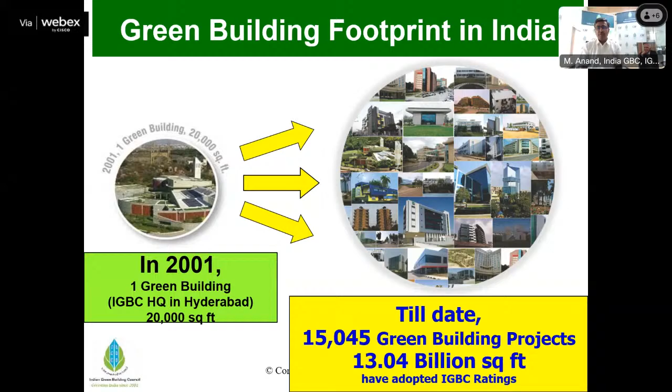Anniversary is on 26th January. We celebrate this Harit Prem Bharat Mahotsav as part of the celebration. Every day we celebrate his ideas, inspirations, and his thoughts. But this particular week is all the more important for us because he is a guiding light of India's green building movement. He is the Bhishma Pitama of green building activities and sustainability as far as we in India are concerned. This is one of the lovely interactions we had way back in 2002 itself, almost 22 years ago.

Even before walking into our own IGBC headquarters, we were involved in a seminar and workshop led by Dr. Prem Jain Saab in New Delhi on energy efficient windows and buildings. This was one of the earliest interactions. I myself am very blessed and honored to share that Dr. Jain Saab only caught hold of my hand and asked me to be part of the panel discussion, which I'm very blessed to be part of this particular journey.

Started in 2002, and then Dr. Jain Saab was involved in all the important rating programs till 2018. India's first green homes rating was launched by 2007 under his leadership. World's first rating program on metro rail network, world's first rating program on townships, railways - the list goes on and on. 22 different IGBC rating programs have been launched under Dr. Prem Jain's guidance, covering majority of the typologies.

IGBC's regional chapters - 30 of them are presently operational across the country. He was very passionate in launching new regional chapters across the country. He made sure that he attended every single IGBC regional chapter launch program, and was able to guide the new leadership coming up in the chapters, making all the chapters very vibrant and vivid. We remember all his contribution in making the IGBC regional chapters across the country, which are able to add more value to the stakeholders.

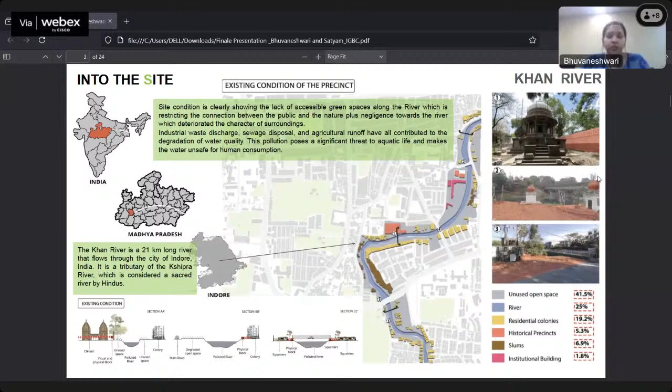So the first idea we put forward is to identify the built form priorities. We also conducted a survey asking about people's experience near and surrounding the river - what kind of open space they have for interaction with others, how safe they feel within a space, and what kind of activities happen around those rivers.

According to that, we found a few built form priorities, wherein certain built forms were supposed to be preserved, such as the chhatris, which have heavy heritage value. Certain structures were very old and had to be reconstructed or restructured, and certain built forms were unauthorized - scraping out those structures and providing better shelter in the surrounding area would be a better idea, is what we came up with. We also went through a few case examples to get a better idea on how to proceed with this project. One major project we studied was the Rajkot Greenway, the NMT corridor.

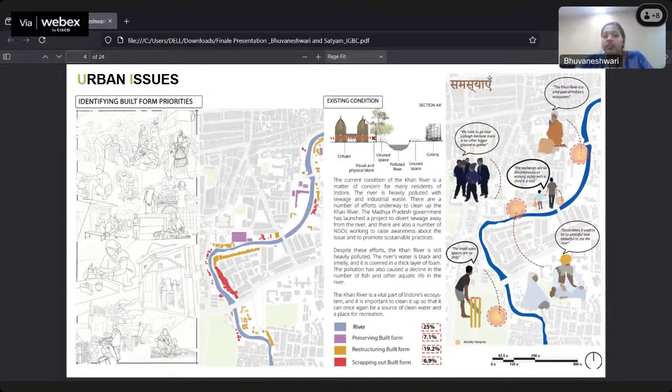So they had a beautiful idea of preserving the natural heritage of the river by making it people and pedestrian accessible. The way they had created activities and interaction between the nature and the people inspired us a lot.

There were a few key learnings from that, wherein they exhibited strong stakeholder engagement, created a safe and accessible environment, and how mixed modes of transportation for that area had helped the people.

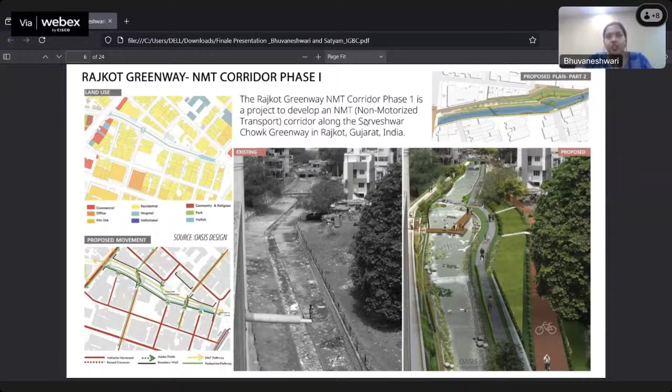And the design was not just based on the particular area. As I told, from cell to organ, they had provided for that area and connected that to a local area plan level, which in turn is a long-term vision, and how NMT is like a catalyst for a healthy lifestyle. Those are longer goals and visions we'll have to look at for a city's development. So this is our design approach.

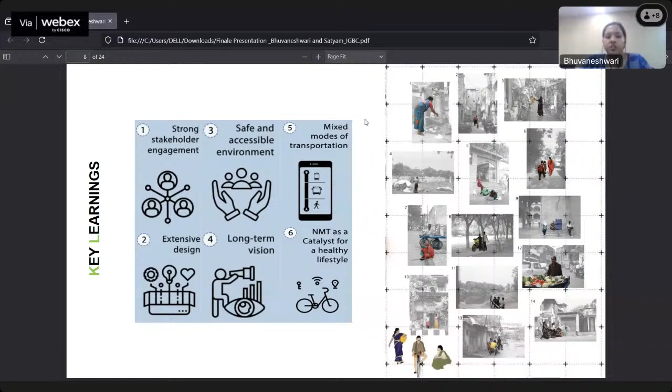For the concept part of it, as per the areas that I have marked here, this is just an earmarked area for us to exhibit our design idea. So we took a particular portion of this land so that we can exhibit this concept in that area and see how it works out.

Similarly, we created 3 typologies: placemaking and preservation, revival and rearrangement, and connection and collaboration. These 3 ideas were given specific case areas, and they were implemented as our design in those areas to exhibit our idea through them.

Whatever issues we found were the poor quality of water, inaccessible existing riverfront, and heritage which is inaccessible, and there is no riparian zone for the river's natural heritage, and absence of a soft edge and riparian zone along it.

So we wanted to prioritize the blue-green infrastructure over here so that it will be both beneficial for the nature and for the people using the same.

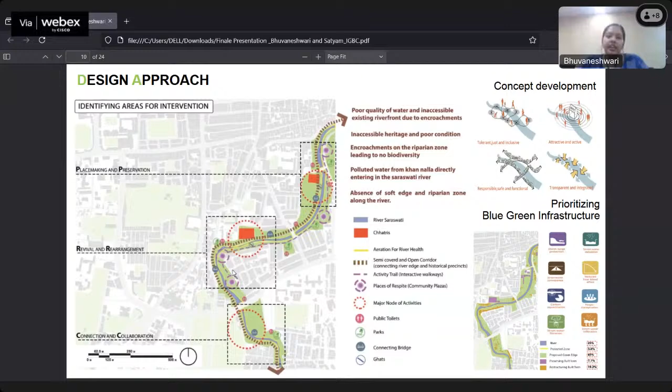With all that, we came up with a vision, which is reconciling the natural harmony of the past. We did not want to just keep the physical heritage over there; we wanted to collaborate the natural heritage with the physical heritage, and give the place a character as such.

The themes that we worked under were culture, ecology, place, and movement. According to these themes, we were trying to create a sustainable, accessible, and also an aesthetically pleasing urban green space.

The major things we were trying to address were the ecological degradation there and how we can enhance public access, while promoting urban greening and also preserving both heritages and building climate resilience.

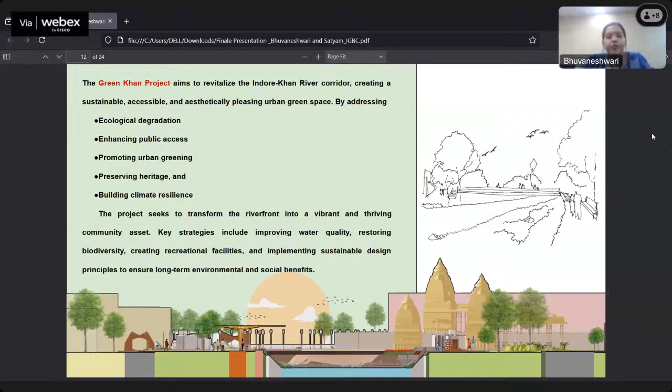So when we were doing this, the main concept of our vibrant urban voids would be incomplete without following the sustainable development goals. When we were talking so much about sustainability, we saw what are the major sustainable development goals that go into our project as well.

According to which we made our strategies. After the vision, coming to our concept and strategies: strategy A was to integrate natural elements into the urban fabric, strategy B was to design for walkability and cycling, strategy C was preserving historic buildings and cultural heritage, and strategy D was to foster a sense of community and connection. These strategies could also be done in phases.

So if the project is getting implemented, these strategies can be put from A to D in such a way that it can be the execution as well.

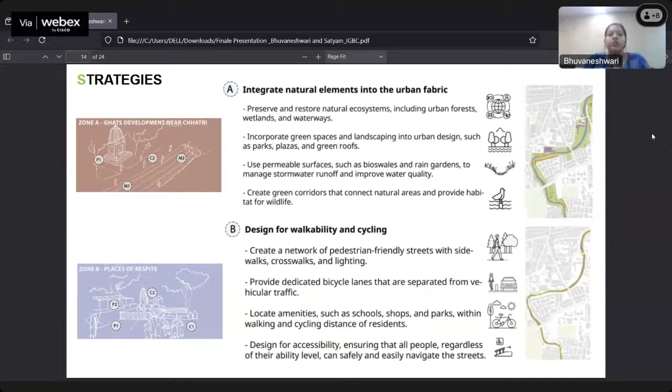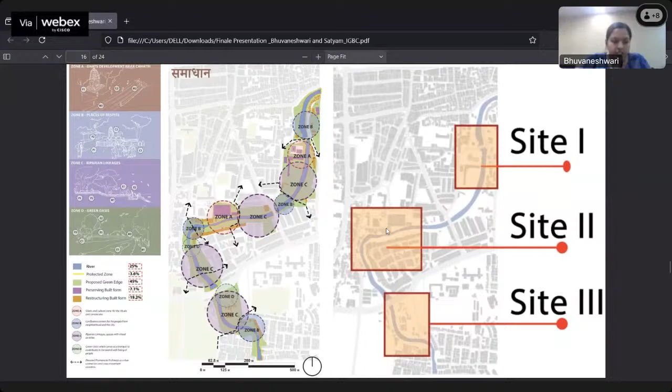So these are the 3 sites that we picked, and the zones we classified them into: zone A will be the Ghat and cultural zone, zone B will be the confluence corners, zone C is the riparian linkages we are talking about, and zone D is the green oasis.

So this is just a pictorial representation of what strategy will come where. It's just a very broad pictorial representation that we could do.

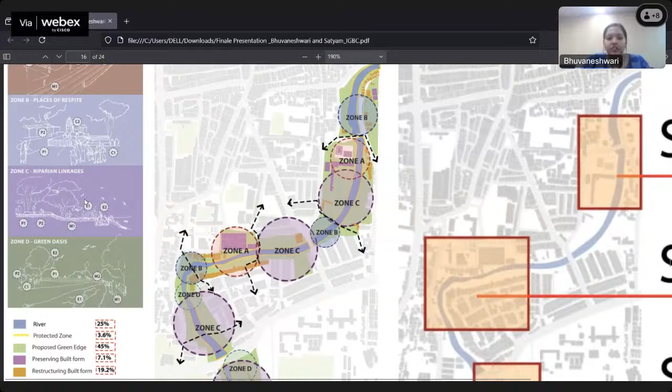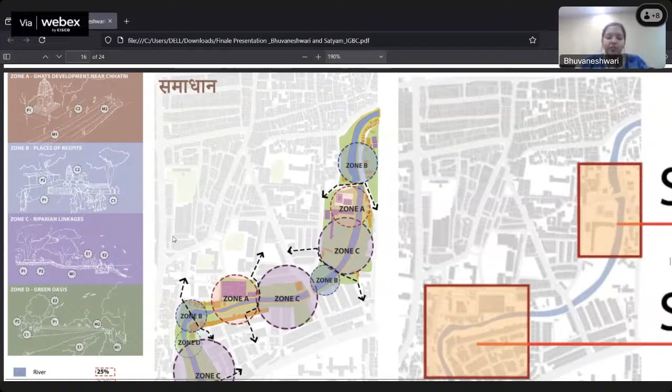So I am coming to the final design, wherein the sites have been developed. This was from paper to computer. In the paper, first we hand drew all these zones identifying each particular zone. After identifying each zone, we categorized them and put in a design related to that zone in that particular area. I do have a video explanation with the design walkthrough, so I'll briefly explain the design and then move to that video.

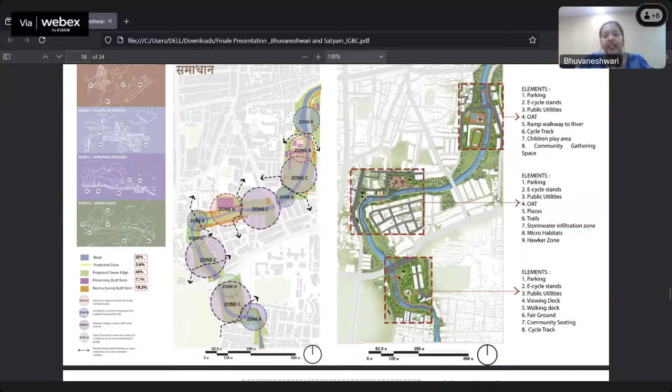The major issues we addressed were STPs to be constructed so that further exploitation of the water wouldn't happen. Whenever we plan for a waterfront or riverfront development, we should also consider how not to exploit the river further. Thus STPs and afforestation drives around that area, and also public awareness campaigns, are very important.

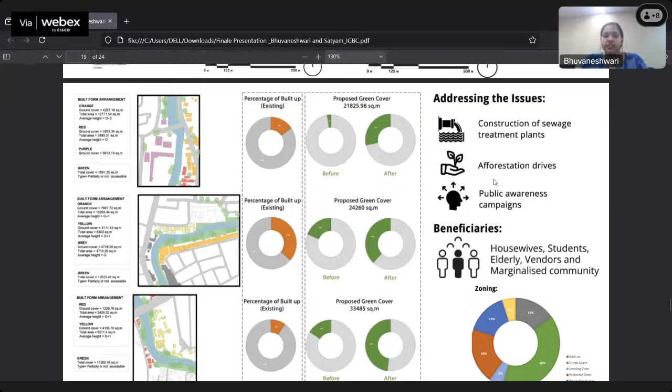The beneficiaries around this were the stakeholders, and comparing the existing built-up area with the proposed green cover, we can see a drastic difference between these two.

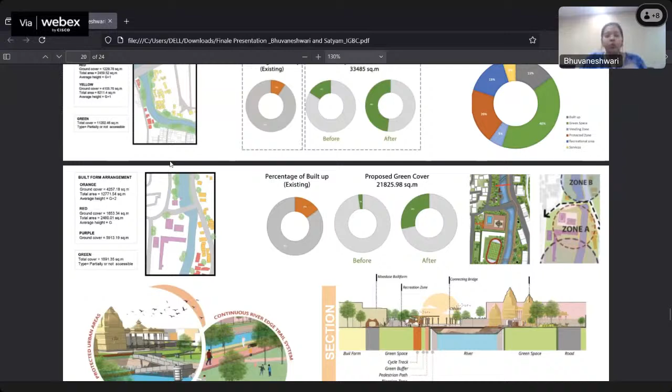This is site 1, which has a chhatri. It's not a very big chhatri, in fact it's a very small congregational area, wherein they had a huge green cover in this area unused. It was left open for a school and had been degraded over years, and then compounded as well. So this area can be used for the public. They only had this Lal Bagh Palace playground. This playground can be opened to public along with the riverfront development, which is what we proposed here.

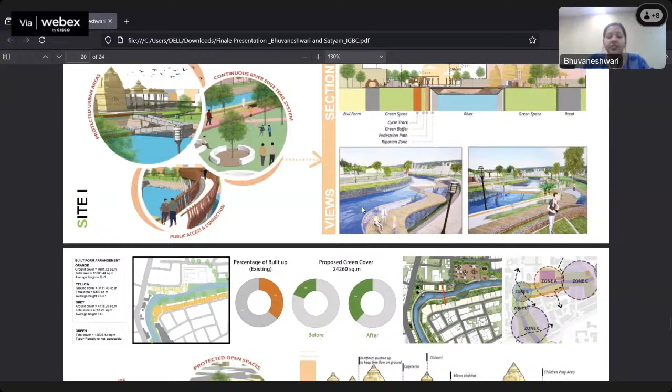In site 2, we have the main Chhatri, the Ahilya Bai Chhatri. This is a very historically important place wherein in earlier times all the buildings used to face the river. The major difference between the Chhatri and the buildings now is that the buildings face away from the river, while the Chhatri was the only thing still facing the front. They had compounded it as high as possible so there would be no access from the Chhatri to the river. So the first thing we did was break the compounds and create a pause point and protected open space, and also a microhabitat along with viewpoints, so there will be interaction between people and nature, which was our major vision: reconciling the natural harmony of the past.

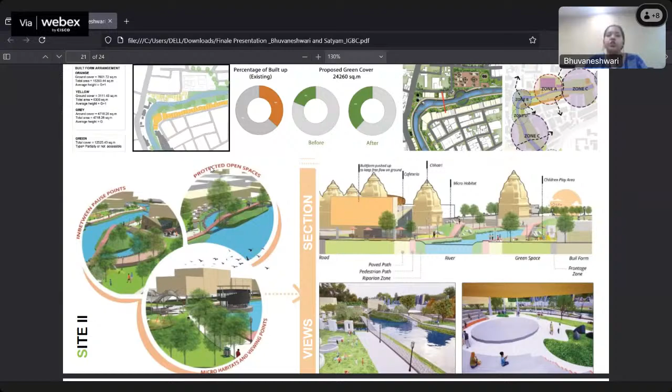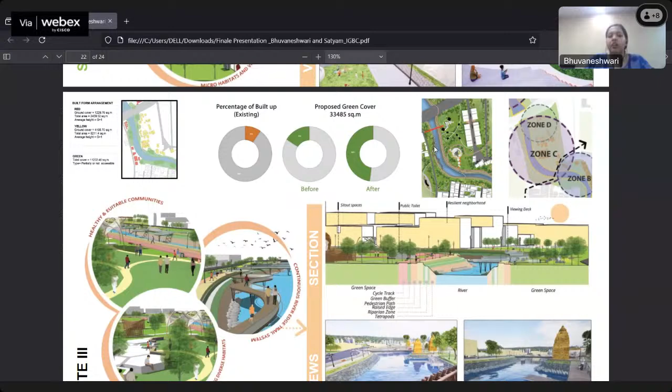The third site also had a very large open space right next to the river. It was basically used as a dump yard, and it was electrically fenced. Our proposal was to remove all that, clear off the dump, and use that urban void to turn it into a vibrant urban space.

I'm done with my presentation. I'll now move towards the video. Let me share the video right now.

Bhuvaneshwari, while sharing the video, please click yes to share computer audio. Sure. The text is also coming in the body - the captions from your speaking are appearing on the presentation. I guess there's a setting to turn off the captions. Yeah, I guess it's gone now. Go ahead.

I hope my screen is visible to you and the presentation is on. Yes, screen is visible, you can play the video. This presentation does not have any audio, it's just me explaining through the video. This is the video.

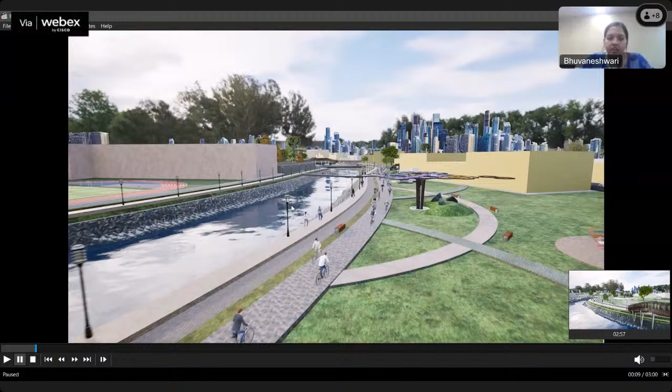This is site one, wherein the playground and everything comes together, and we are trying to define it by the hard and soft edges. These areas come under the hard edge, wherein we have done all the viewpoints, a crossing over the river, separate cycle tracks, and pedestrian pathways along the riverside. There is already a bridge running for cars over here. Next is the smaller chhatri we have around here, which is a small congregational area. We've made one viewing deck here, and also a crossing bridge in this area, so it will be a much more vibrant and attractive public space.

Then moving on to site 2.

This is where we have the major chhatri. So we have also given a nice viewpoint, which is universally accessible, and also the same method along the NMT corridor. We have introduced riparian edges in this area because it's more ecologically sensitive.

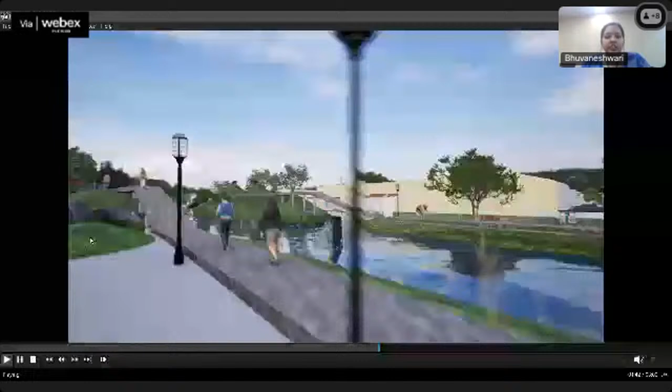We have also tried to create a small micro habitat in this area, like small mounds. These mounds will also be created by desilting the river, creating a micro habitat area that will also serve as a viewing point.

And the third site will have the major viewpoints on the river as such, and this comes with a hard edge as well. The same pedestrian and cycling tracks that we have given along here.

So this way, giving small and meaningful interventions in those urban voids can bring in major change, which was our idea.

That's it. Angad, you are from Indore, would you like to say something? Would you like to have some comments on it?

Definitely. The areas we're talking about here, to my surprise, I was very happy to see that Khan River has been worked around in this project. Khan River holds a very prestigious past for the city, and the kind of interventions that Bhuvaneshwari has tried to make actually make a lot of sense.

There have been a lot of other interventions and proposals around the city, and as I mentioned earlier, it's been close to 25 years since urban interventions throughout this entire belt were first planned. There are proposals now every 3 to 4 years, and there's documentation in the city of how, with the changing fabric and requirements, the whole idea of redeveloping this Khan river, which is a Nala right now, has changed.

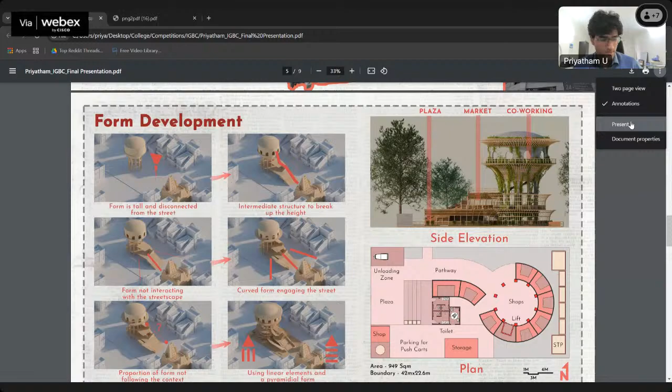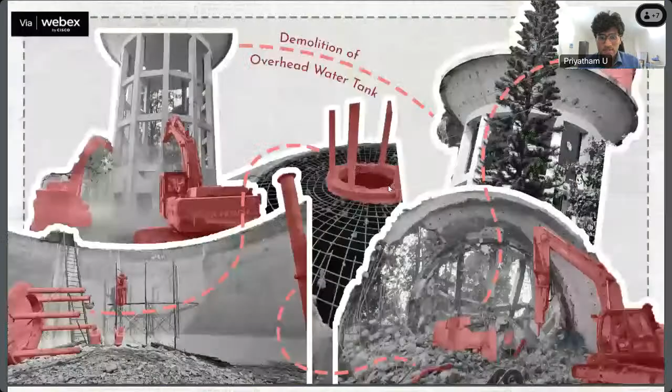To start off, these pictures are from a demolition that occurred a few years ago in Jayanagar, a locality in Bangalore. At first it might look like an issue of aging or structural weakness, but that wasn't the case. This was just a few decades old with not much issues; some maintenance would have sufficed. Then maybe it might seem like a legal matter, but this was on government land without any issues either.

Here we have a large RCC structure that was fully functional and capable of providing water for decades. Then why was it demolished? So, coming to the problem identification...

The Bangalore Water Supply Board used to identify ridge points and build two structures: a ground level reservoir and an overhead water tank. They would pump water to the reservoir, which would then pump water to the tank, which would slowly distribute water throughout the day through gravity effect. But recently, the Water Supply Board has found it easier to directly supply water without routing it via these tanks.

So now, almost half of these tanks in the city are sitting empty. Most of them have become redundant, and they're quite costly to maintain as they're currently serving no purpose. News articles have mentioned that these now stand out like sore thumbs. The chief minister of the time had even mentioned that no tank is in a dilapidated condition, but they might be demolished anyway as they are serving no purpose.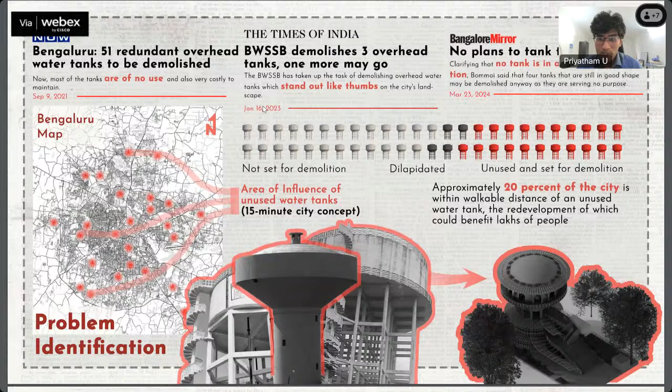Coming to the site, this serves as a pilot project located in Srirampura. It's a dense neighborhood within central Bangalore with adequate public transport, including a large railway station, a metro station close by, and a bus station.

It is an extremely dense area with not much community space, but there is quite a lot of potential. There's a vibrant culture that can be tapped into. There's a temple right across the street which conducts many seasonal activities.

This road is very narrow, so whenever the temple conducts activities, they spill out onto this road, but there is no space there. There's also quite a lot of street vendors in this area, around 20 of them. Because the temple is right here, this area has become a natural hub, so street vendors and other small commercial activities have all congregated into this area. So the potential for this tank to be redeveloped into something that serves the community is quite high.

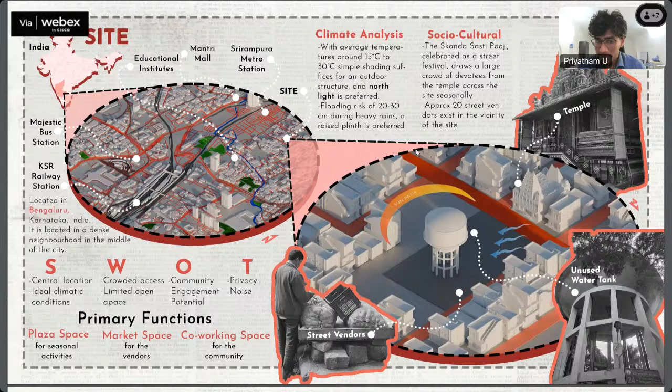The goal was to create a project that satisfies many needs of this area. The primary functions are a plaza space for the temple's seasonal activities, a market space for the vendors, and a co-working and skill development space for the community, all located within the tank.

Before starting the form development, I'd like to talk about capacity analysis. This is something done before an adaptive reuse project, to understand how a structure works before readapting it, and to understand its positives and negatives.

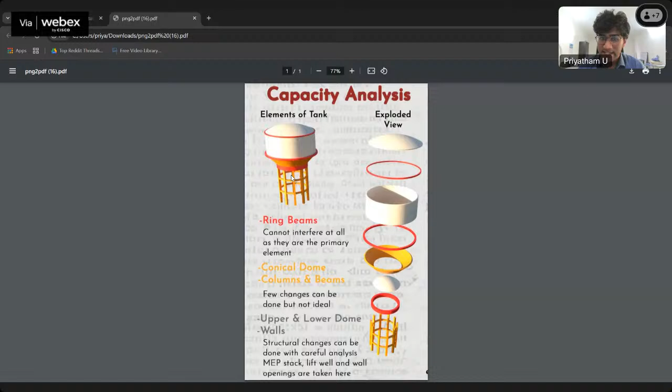For an overhead water tank, there are a few elements which cannot be touched - these are called the ring beams, the key structural elements of the tank. Then come the conical dome and the primary columns and beams - minor changes can be done, but it's not ideal. Then we have the upper and lower dome plus the walls. Careful analysis must also be done before starting these, but they can have a few interventions - the MEP stack, the lift well, and openings for ventilation are all taken within these spaces.

Coming to the form development, this tank, being around 4 stories tall, is quite disconnected from the street. According to many urban theories, if a building is too high, people will not interact with it or want to go inside. So an intermediate structure is introduced to break up this height, making it more inviting to enter.

Another aspect is this form is not interacting with the streetscape, so a few parts are blocked. This curved area is given so there's quite a view from the street, so everyone in this area wants to enter this place, creating more engagement with the street.

The biggest aspect that drove the form of this project was the temple across the street, the largest context present. The proportion of this form was not following this context - a water tank's main mass is at the top, whereas a temple is pyramidal in nature, its mass starting at the bottom and stepping up, so these are contrasting. A tank is also circular in nature, whereas a temple has many linear elements, so this has also been addressed.

A more pyramidical form has been given, to integrate the shops within this type of form. Bamboo and other wooden elements were chosen to introduce more linear elements, so the context is respected.

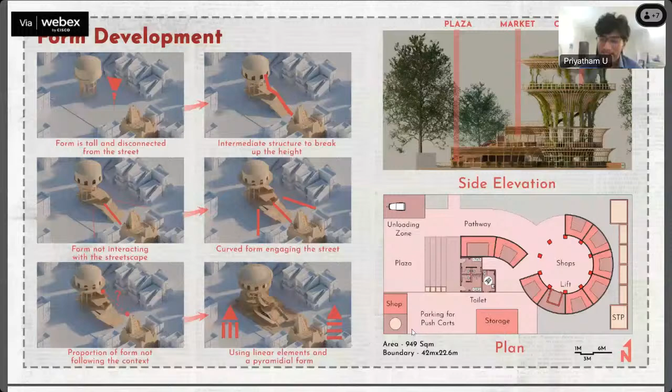But the key factor is these water tanks have already utilized their lifespan by a few decades. Bamboo has a shorter lifespan, but when you combine these two, the end of the life cycle of these two materials comes around the same. So it proves very useful and efficient to have a combination of this sort in adaptive reuse projects. Because if a structure is decaying and we install a 100 year lifespan RCC structure, then again the same story would repeat. So the material choice was important.

So the three main spaces are the plaza, the market, and the co-working community space. So the first space, the plaza.

So this temple hosts a seasonal festival called the Skanda Sasti Pooja. This is a reenactment of a battle that requires quite a lot of space. There was only a 5-meter area in the road where the entire neighborhood would come and try to witness this festival. So it would be quite overcrowded and not enjoyable. So adequate seating and space is provided for them. The stepped form also provides enough view that anyone can see it from the place.

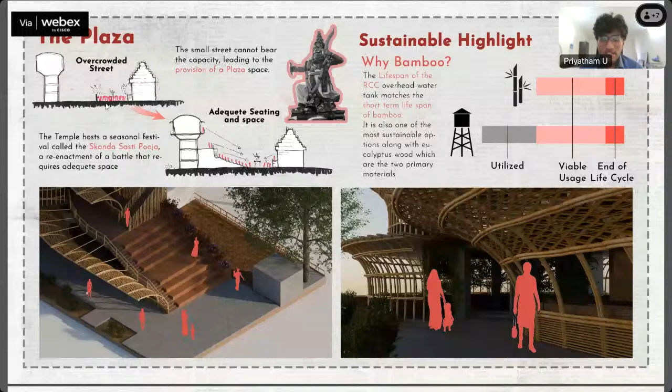Coming to the market, as mentioned, since this became a congregated area for all the vendors, and quite a hub because of the temple, it becomes very cramped in this area. The vendors don't have enough area to sit and sell their produce, nor is there enough area for circulation of pedestrians and vehicles. So this relieves the area and benefits all the members present.

So another highlight is a natural STP given in this project. It is a concept of phytoremediation, an environmentally friendly technique that uses just a few species of plants to slowly detoxify the waste and give treated water. It is ideal for a scale of this size, for a commercial building, so that has been used here.

So then comes the space at the top. For the structure itself, since it's a circular form, there will be quite a lot of echo. So there are openings given here so that this sound effect is prevented.

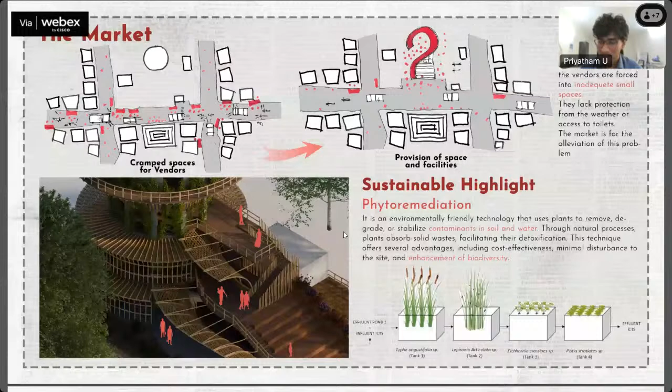The main idea behind this is that these startup rental offices that exist are quite expensive for the common man. So someone who wants to start a small scale business, or freelancers, will not be able to have this initial boost without government help. Since this would be a type of government project or public-private partnership project, it can be given at a subsidized rate. This can have focus rooms, privacy, so people who want to start off their career can utilize the space.

Few other sustainable highlights that were provided were bamboo-ponics. It's based on hydroponics, a soilless farming technique. It can be provided along the columns of this area, and can be sold fresh.

Another aspect is the reuse of these discarded pipes. Each overhead water tank comes with 3 pipes: the inlet pipe, the outlet pipe, and a drain pipe. When you combine 4 stories of these extremely thick steel pipes, we have quite a lot of leftover material, so these have also been repurposed into seating. And then solar power has also been given to power all these facilities.

It is said that the most sustainable building in the world is always the one that has already been built, and that was the key focus of this project. This is just one overhead water tank that was designed based on the context of this area. There are approximately 26 more of these tanks across the city that are sitting empty. Each of them comes in different typologies - some are ground level, some are thinner, taller. All of them can be repurposed into various typologies: skate rinks, libraries. The possibilities are quite a lot.

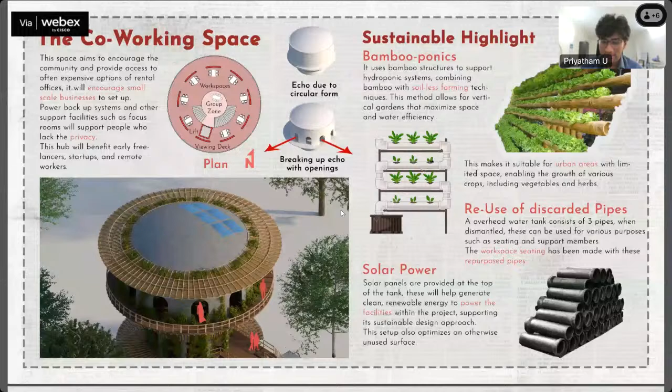Would you like to comment, sir, after listening to both? Very interesting presentation - you've brought out how beautifully that water tank has been utilized, and the temple precincts, creating a nice ambience for the people, which is very challenging. But he converted that challenge into a good opportunity, using bamboo as material to create a good built environment. I think credit has to be given for that.